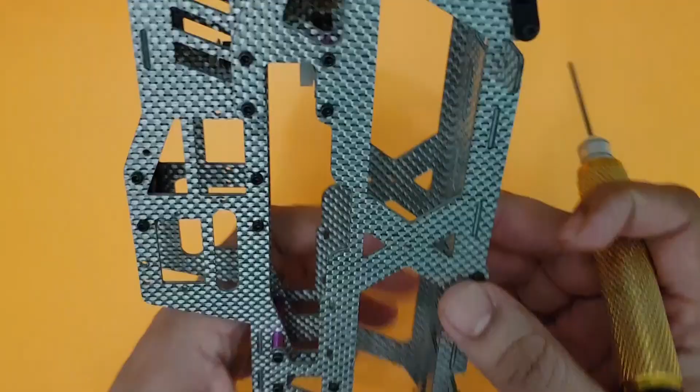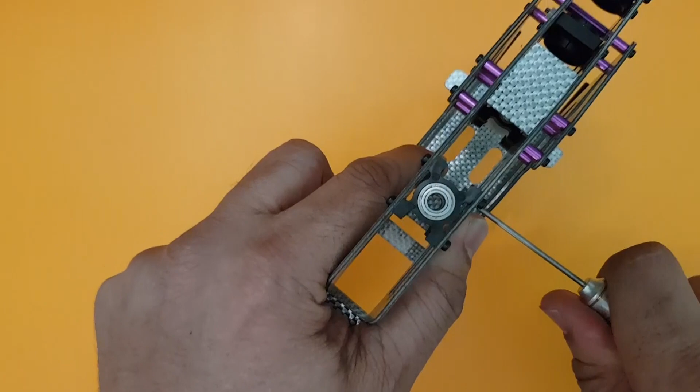And wherever there are plastic parts, if you really want to glue it permanently, what you can do is take a drop of epoxy, maybe araldite or any other kind of 5-minute epoxy, mix it up and just put a very small drop. Again, I don't recommend this, but if you really want this to be literally permanent, put a small drop here on one of these corners and go ahead and tighten this inside tightly. But the problem is, if there's any issue, you will have a mess of a problem removing this. So in any case, I don't recommend it, but if somebody wants to do it, they still can go ahead and do it.

Let's see, everything seems to be here. We have got the tail boom support holders in place, the tail drive unit, and the main shaft bearing rest. This seems to be packet number 1. So let me pick up packet number 2 and come back to you within a minute.

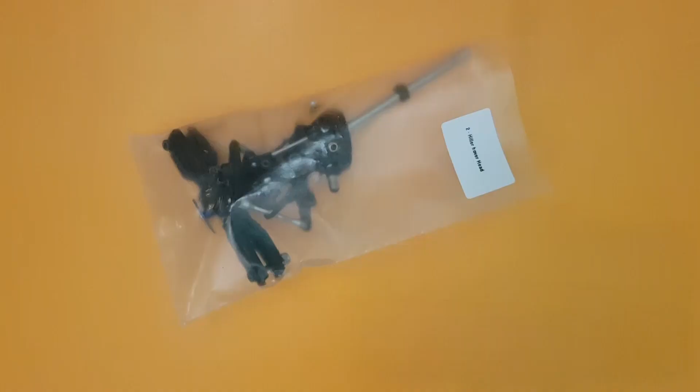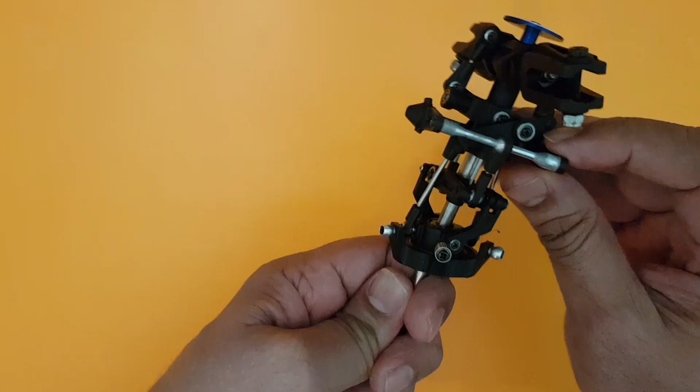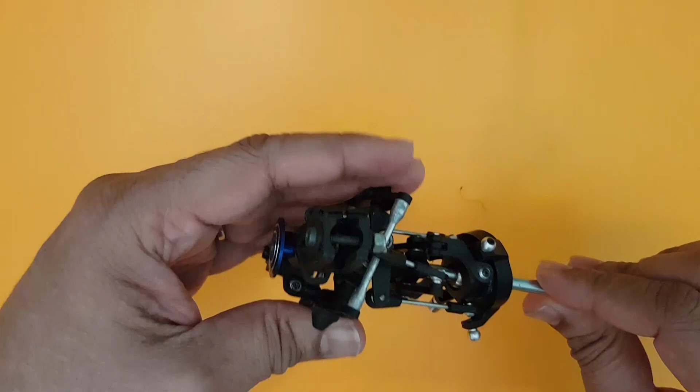Okay, I have the second pack now, which I've just opened. This is packet number 2, which says Hiller rotor head. I have the entire head assembly here in front of me. Seems to be each and every part fixed here. Even the head stopper here is already fixed. The flybar seesaw assembly is also in place. I can see the washout base is also in place, the swash is also there, and you have even the stopper, which is fixed to the main shaft. So everything seems to be in place.

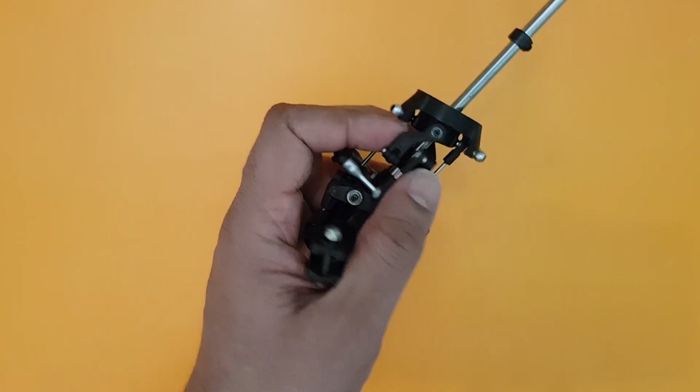And again, as I stated earlier, we just need to check each and every part if it's been Loctited or if it is fixed. Usually at the factory level, they don't try to Loctite, but I would prefer for any metal to metal contact, please remove and Loctite it. Most of them have got Phillips screws, so you will require a star type screwdriver or a Phillips screwdriver to check if they have been tightened. And again, please, for God's sake, do not over tighten them, because this is made of plastic.

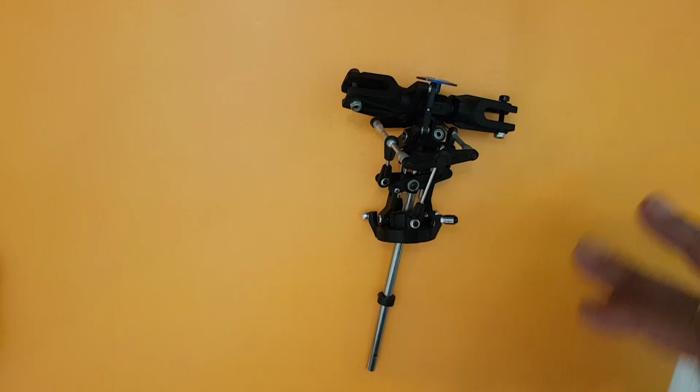Let me take one step back and tell you guys that this heli is good for beginners. It is good for hovering, good for nosing, good for any sport oriented mode. It's good even for inverted flight, but this is not made for any kind of hard 3D. Of course, you can go ahead and learn as much as possible, you can crash as much as possible because even the parts are cheap and available.

So this again is good for a beginner. There will be some kind of slack across in this heli. Don't expect it to be a completely 100% precision machine like any other high-end machines like the Goblin or the Furion, the MSH Protos, etc. So this is a good beginner heli to start with, a cheap heli to start with.

And wherever there are any kind of screws, just try to see if they have been over tightened or less tightened, but just go ahead and tighten them, and all of them should be moving smoothly like this. And of course, for this entire head assembly, there is also a manual online at RcBazaar.com.

So I've taken up a few pages here. Now you can see I've got page number 3 here. The entire assembly is given here. So even if you have broken the head, you can actually open this up and check it for the parts.

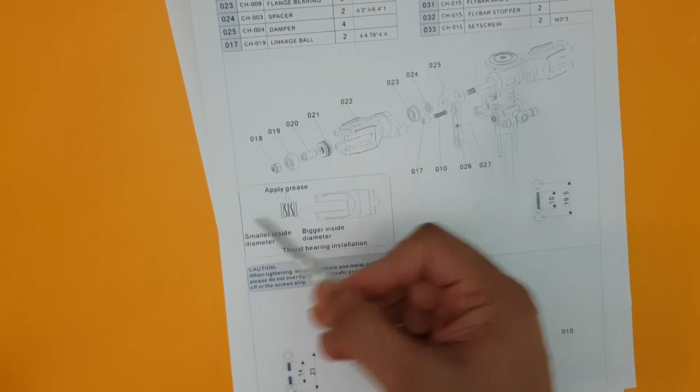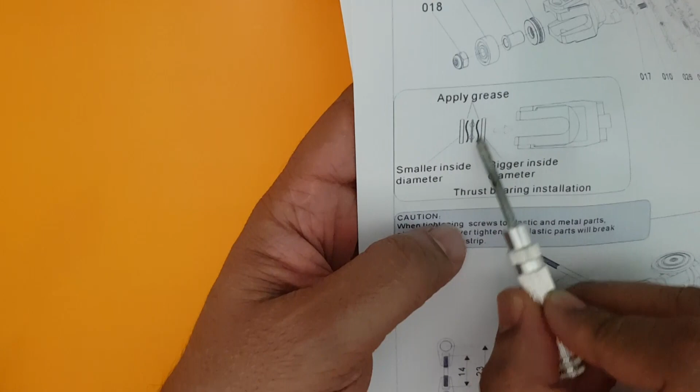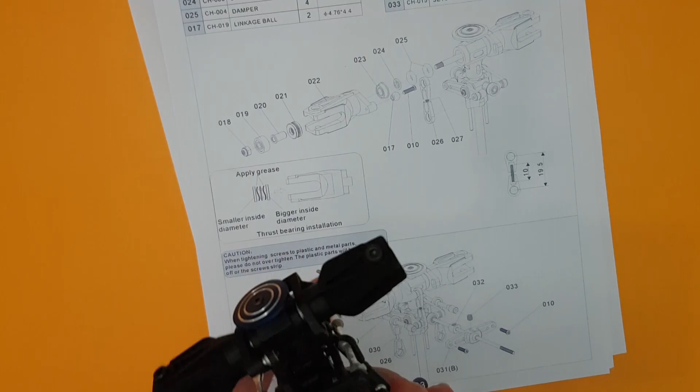You've got the dampeners here, the spacer here, and the nylock nut here. It's quite easy, and of course the thrust bearings here, and also the way the thrust bearing goes, which is the smaller diameter and the larger diameter, and how to apply grease inside has been very clearly stated in this manual. So go ahead and go through the manual first, and then you can start going to the next stage of assembly.

So everything seems to be in place here. Let me just pick up the frame. What we need to do later is start inserting these, which are step 2 and step 3. I'll come back to you later, step by step. Let's go and open package number 3 now.

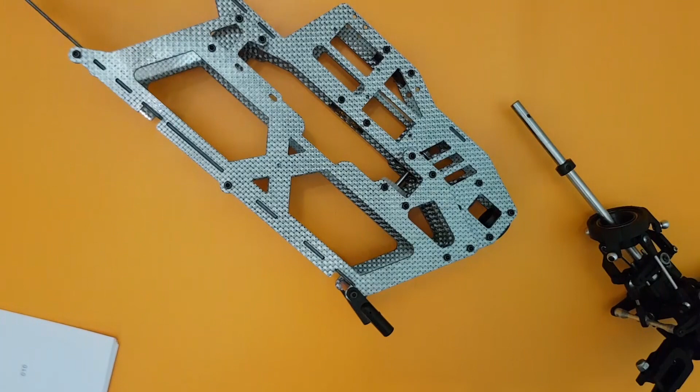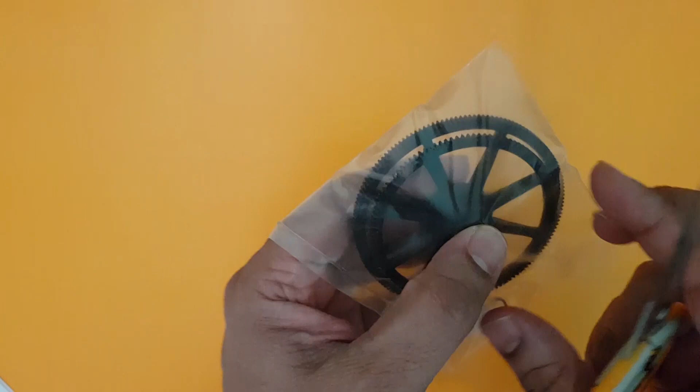So this is package number 3, the heli main gear unit. I can see the main gear, the anti-rotation bracket, or the smaller gear, which I can see the one-way bearing is also inside here, and I can see a very small spacer here.

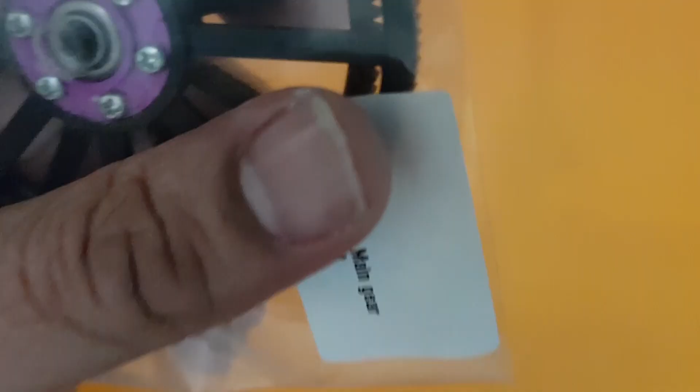Guys, be very careful with this, don't lose this, because this has to come here. But let's go ahead and open this anyway. Okay, let me get rid of this. So here you have it, and of course this spacer.

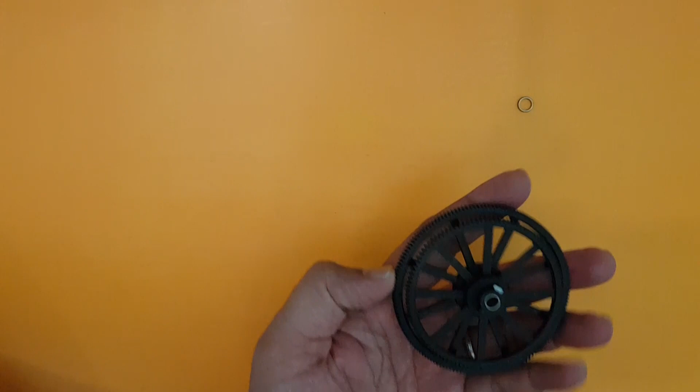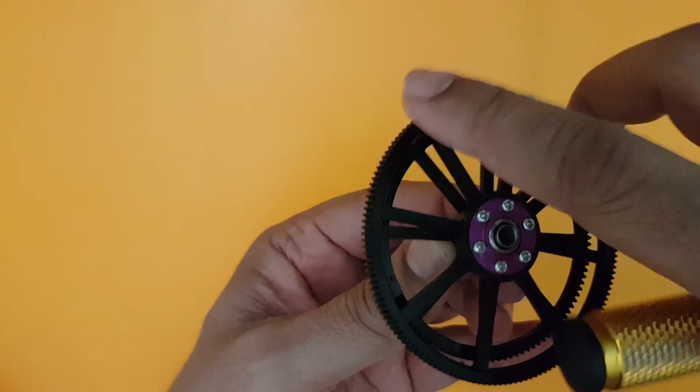I can see even the screw is already installed by the factory. I'm sure you can see it here. If I can get it a little bit closer. Yeah, here you can see the screw is also installed here. So of course you need to remove it so that it goes to the main shaft, and this way it will not turn because it will lock, and this is the way it will turn.

So it's got a one-way bearing already installed, and as I stated earlier, be extremely careful with this. Do not lose this or you'll be in trouble later. This has to go on top, and then the main shaft will go through this. So this is package number 3, and let's pick up package number 4 right now.

And this, I reckon, is the entire tail assembly. Let me just pry open this right now. Okay, here you've got the belt, you've got the tail assembly.

Okay, one of the screws came out. This will actually lock the tail boom in place. So let me just keep this safely and securely here. Just give me a minute if you don't mind, so I don't lose this later.

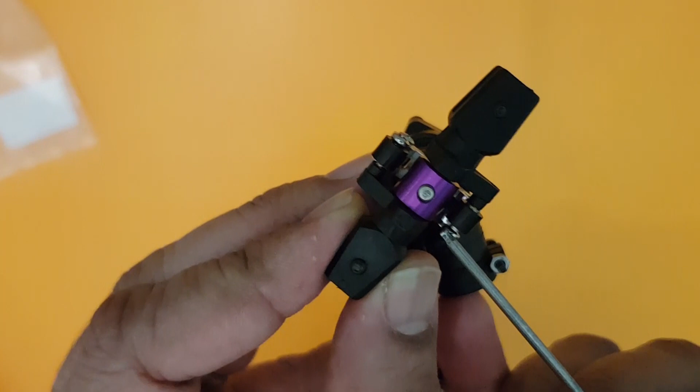Okay, so everything seems to be assembled pretty neat. And of course, please always, as I stated earlier, look at any kind of looseness or over tightening here. I can see there is some gap here. If you can see, there is a little bit of gap here, which I will go ahead and tighten using a screwdriver, a Phillips screwdriver.

These details we will come to later. As far as this is loose and not over tightened, or it's not binding, it seems to be fine. So this is package number 3 — no, sorry, my mistake, this is package number 4.

So we are back again. Now, before I proceed with opening up other packs, I thought I will take you through fixing these servos on the frame, because once we fix the motors and the head, it becomes very tough for anybody to put their fingers in and fix the servos. So I thought this would be the ideal point to stop opening the packages and start installing the servos.

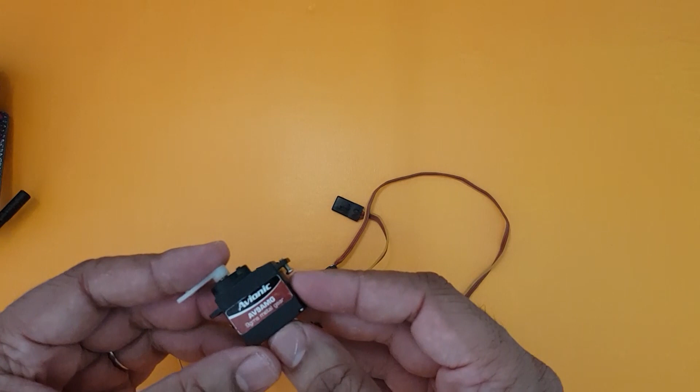So for that, I already had 3 servos with me, which is the Avionic 9-gram servo. This is a metal gear servo. You don't have to use a metal gear — you can actually use a plastic servo, which is the Avionic AV9A if you have it, or any 9-gram servo will do. And importantly, these servos which I had with me, I had already made holes on the second.

Let me just move here so you can have a better view. So if you can see, I have enlarged the hole on the second hole from the furthest hole end on the arm. This is the right position where you can fix the ball, and the ball link can come from here. So if you get a pack of servos, you usually get this.

So what you can do is take a small screwdriver like this, or even a small drill which is 1.5 mm or 2 mm, whatever you have, and proceed with enlarging the second part of the hole like this. It's as simple as this — just turn a few turns and this will slightly get enlarged. Do this a couple of times, and then take the ball link and fix it, which I will come back to in a few moments.

If you look at your manual, on page number 6, it has shown you the direction where the servos go in. Now let us go ahead and start checking out how we can fix the servos here.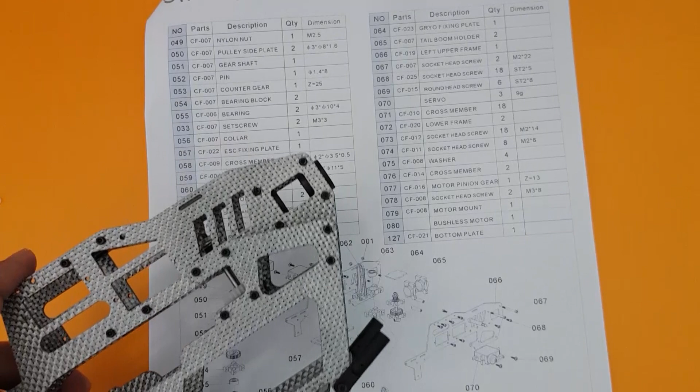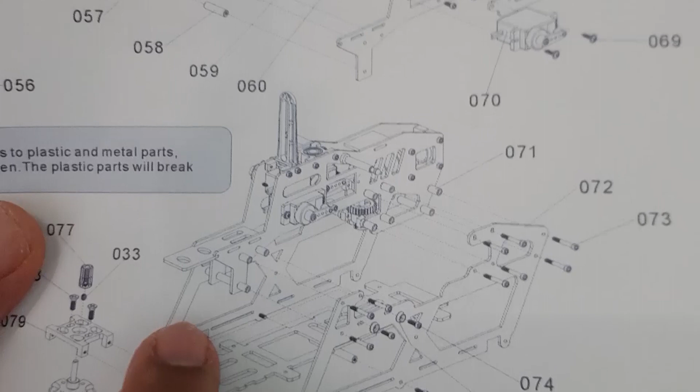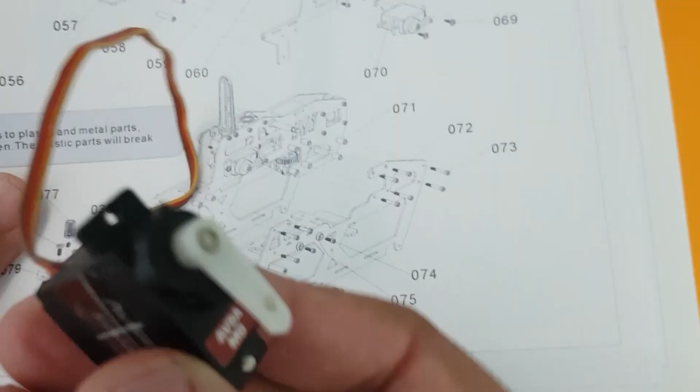If you see in the manual, the servo output shaft is facing towards the nose of the frame. This is the nose of the frame. You can see that the shaft is facing here, which means it should be facing in this direction, not in this direction. So it's as simple as that. Let me keep the manual in the background.

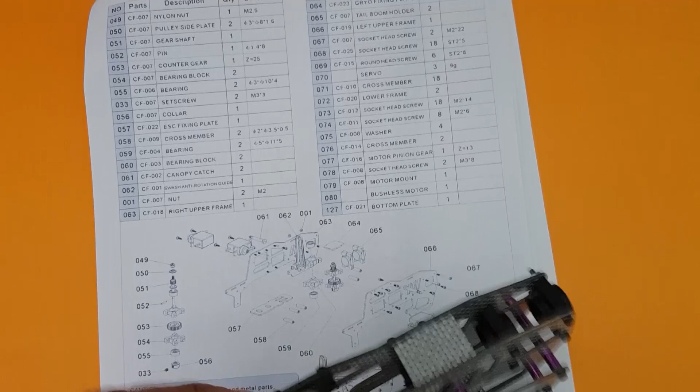Let us proceed and just push this in. So this is how the servo will get fixed. I've got a screw here, let me just remove it. So here we go, I have removed the screw that was there earlier. So this is how the direction of the servo shaft will be. That means the servo output shaft, where the motor sits in for the servo, it will be pointing towards the nose side.

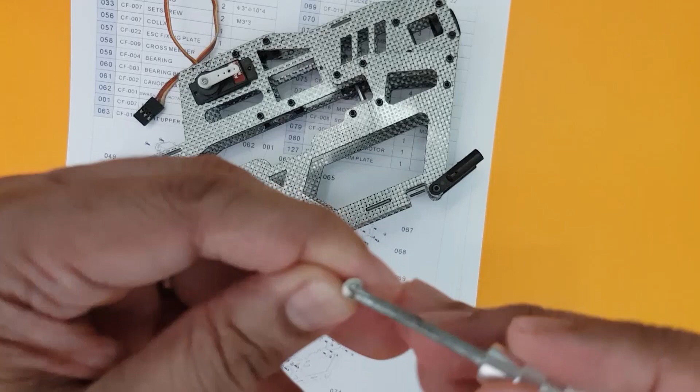So this is how you will fix the servo, and you can see there are 2 holes here. You need to fix a screw, and with each pack of servo you get screws like these, which are self-washered. So you just have to fix it and place this here. But if you see there is nothing at the back side to hold the screw, so what we can do is 2 things: one is get a machine screw, 1.5 mm, and fix it here, or we can use the same self-tapping screw and create your own nut here.

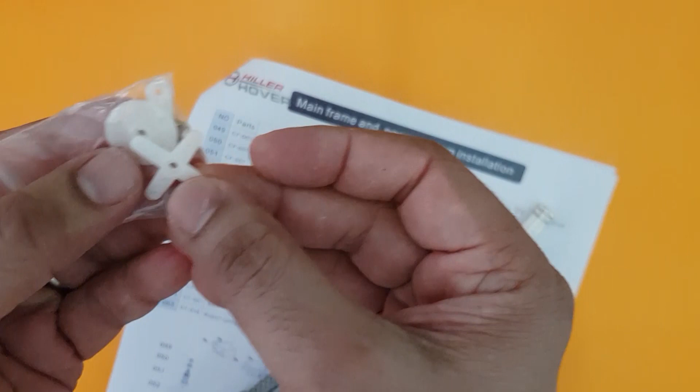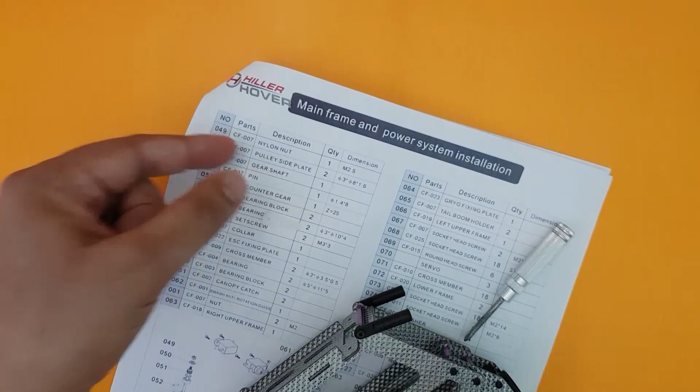In every packet of servos, like this packet, you get 2-3 servo arms. One is round, one is a kind of plus or X type, and one is this type. This one you have already used on the servo, so we cannot do anything with this. So what I would prefer is you take one of these, which is extra with you, and go ahead and leave one hole here and just cut it.

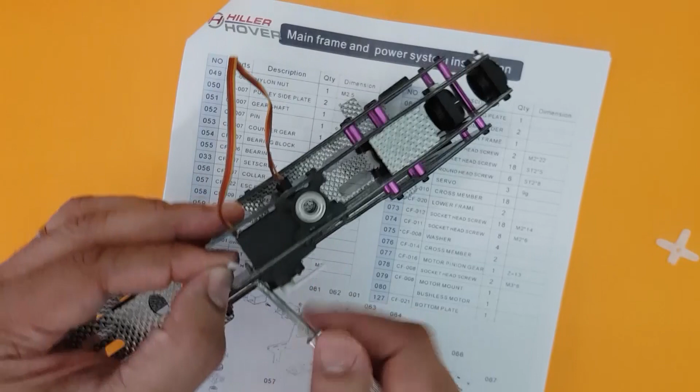I'll tell you the reason why we are doing this. I'm going to cut one of these. You can see here, and I'm going to cut this. So this becomes a small kind of nut where when we are actually going ahead and screwing this up here, I'm going to fix it at the back. Let me see if I can do this right away in front of you, as it will take a little bit of alignment to get this done, but I'm sure we can get it done quickly.

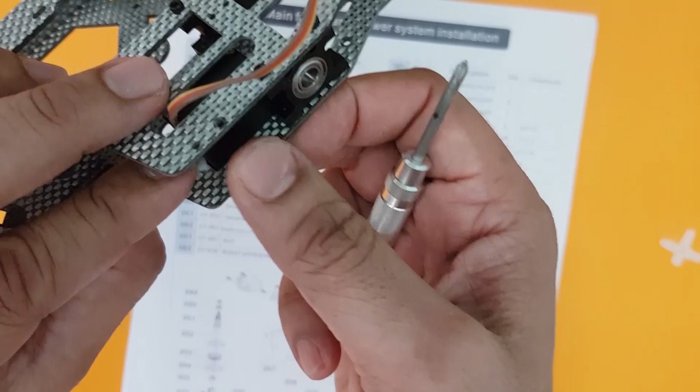So what you need to do is just align this properly here and take a screw and just fix it. Yeah, it seems to be holding, I can feel it now. See, you can see. Let me just get in closer here. You can see this part here, it's slowly coming out. So this entire thing becomes like a kind of washer, if not a washer, kind of a nut to it.

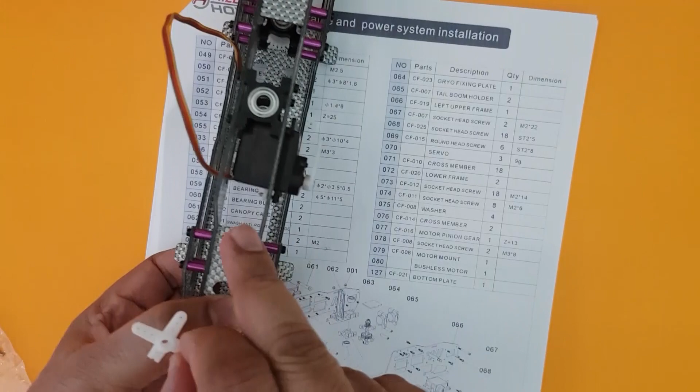So you can go ahead and take these and cut 4 parts, or you can use this part, whichever you want, and go ahead and fix it and tighten this. So I will go ahead now from my side. I will fix all the servos and come back to you with the finalization of how the servos fix.

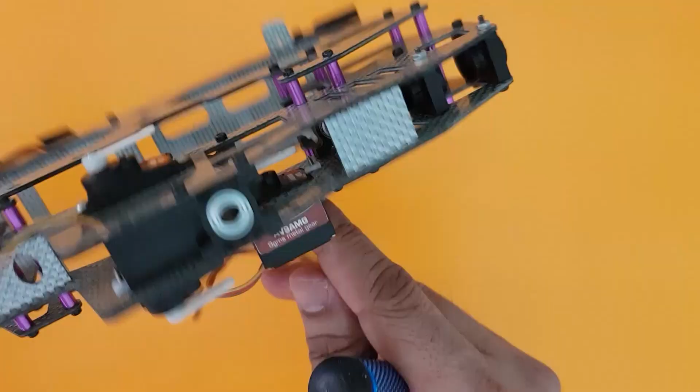Alright guys, I have gone ahead and fixed the servos here, and as you can see, the servos have been fixed properly. Importantly, the way the arms are pointing out, the output shaft of the servo motor is towards the nose. Even here it is towards the nose, and also on this side, which is the elevator servo, that is also towards the nose, and the arm is pointing away from the nose.

So this is the way you should go ahead and fix it. But to fix this, I had a little bit of a problem fixing these nylon nuts. I had to remove this, but I had to remove it very carefully. If you are able to fix this without removing it, it's fantastic. If not, remove it very carefully.

Again, I come back to repeat this: these are made of plastic, do not over tighten these screws, otherwise you will have a problem in your hand. And if you want something semi-permanent, as stated earlier, fix a dab of glue on the screws and go ahead and tighten it, so that you don't have to worry about any slop in the future.

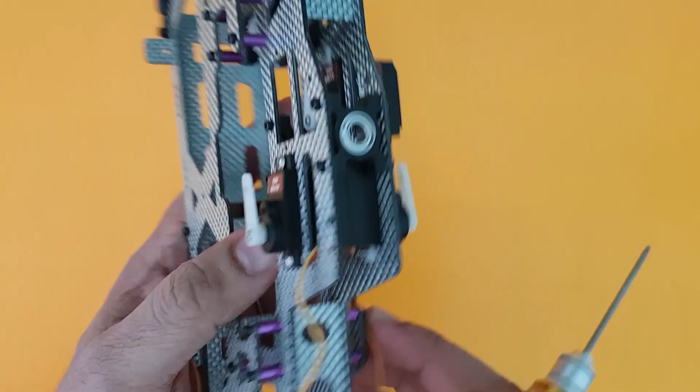So these are all fixed. This is how these servos will be fixed. And let us go to the next part of fixing the motor mount here.